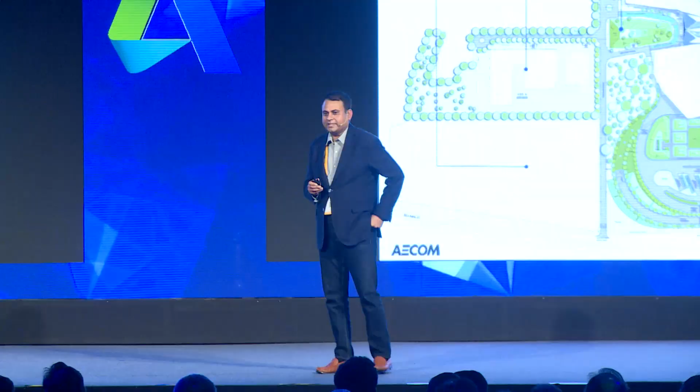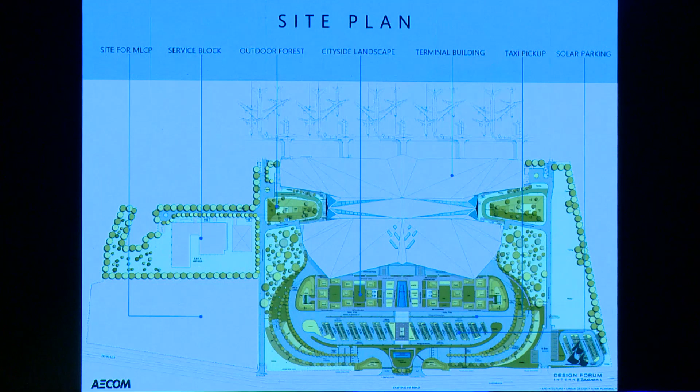So our design for this particular airport was essentially about creating moments, essentially about creating spaces which generate wow. It's a 52-acre site, and in architectural aeronautical parlance, it's divided between airside and city side. The city side has about 52 acres of land, 40 to 45,000 square meters of footprint of the building, airport building, and landscape greens, parking, solar panels, and so on. It's a 120,000 square meter airport building.

That's a close-up, and you can see right in the center the imprint of the origami-inspired sheet roof, aluminum sheet roof that we are putting over there.

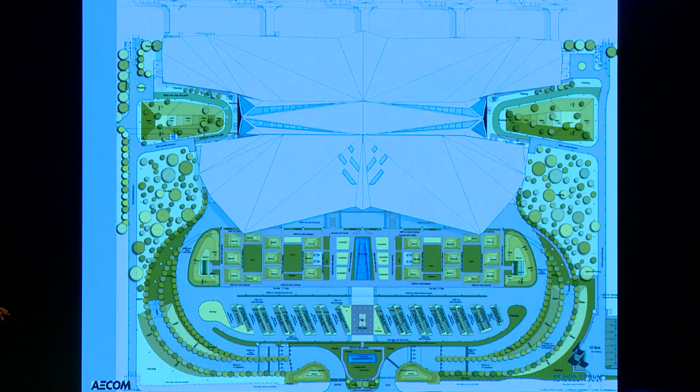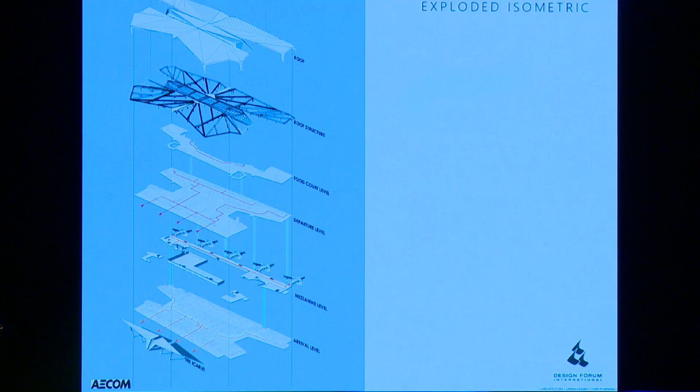That's a section across the building, so it's a 4-level airport. The ground is arrival, of course. The level above is a mix of baggage handling as well as the arrival corridor coming out of the plane and getting to collect your baggage. Departure is a level up, and there is a food court level which is slung over the departure, opening into double-height spaces on either side. There is an extremely complex steel structure on top of it, over which there's an aluminum sheeting roof, inspired from origami, sitting as the final roof of the building.

It is a front inspired by the tea gardens of Assam, because it is in Assam, in Guwahati. There is Icarus, right in the front. And then there are various aspects and components so essential to an airport, which are interspersed through various levels and various spaces.

That's the other section, the sectional perspective on the other side. And what you'll see here is on the extreme left and extreme right, there's a green pocket, which is what we're calling the indoor forest. Probably for the first time in Indian airports, there's actually a large internal forest, indoor forest, abutting an even larger external forest on the other side of the glazing.

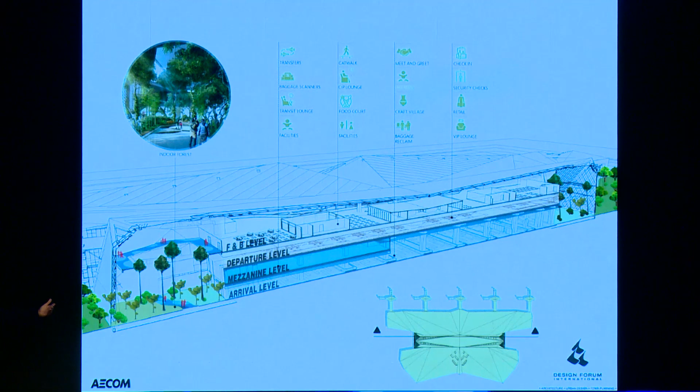So that essentially is a large 2,500 square meter space on both the domestic side and the international side, which is essentially an indoor forest, experienced by people arriving into the airport as well as people departing from the airport. People arriving actually have to pass through it and walk around it. And the people on the F&B level, from the departure, actually get a look and feel, walking around a blue-colored catwalk that you'd see on the screen in front of you.

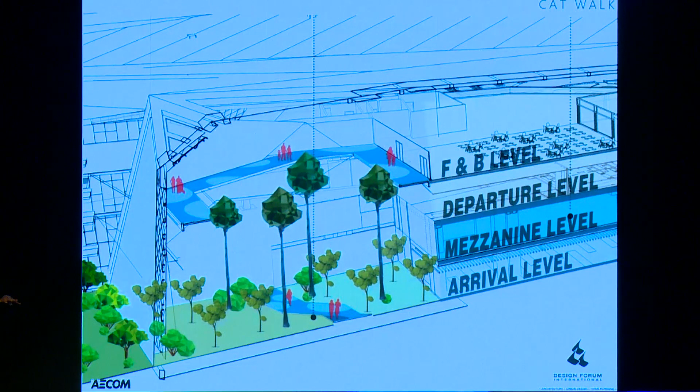You can actually stand there and touch the trees coming all the way from 15 meters below, and the roof.

So origami is not just an art, it's also an expression. We've all flown paper planes in our childhood, made boats out of paper, and we continue to do that. So this is how the form evolved, and this is where I want to bring in why BIM came into play.

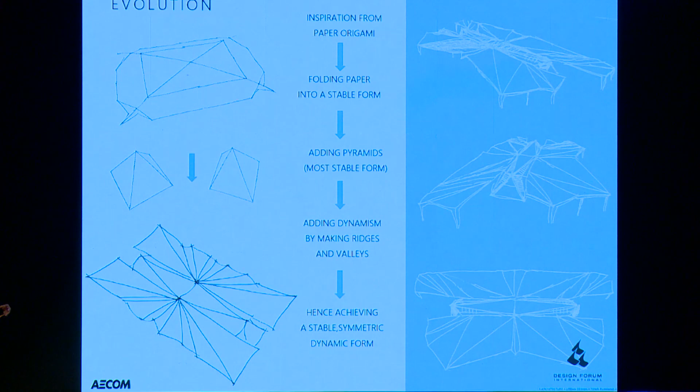So like all architects, you start with an airport as basically a box. We started with a simple box and tried to create some supports on the periphery. But we weren't happy with that, so we said we need to add some jazz to it. We added two pyramids on the extreme sides, left and right, which is what the indoor forest is made up of. And then we found it still wasn't sexy enough, so we had to add a little more jazz. We created ridges, valleys, origami-inspired angles.

Doing all that, there was one comfort at the back of our minds: we were creating an extremely complicated structure, but we had software to back us up. We were mandated to do this in BIM, and luckily so. So that's the roof for you, with skylights to allow for natural light.

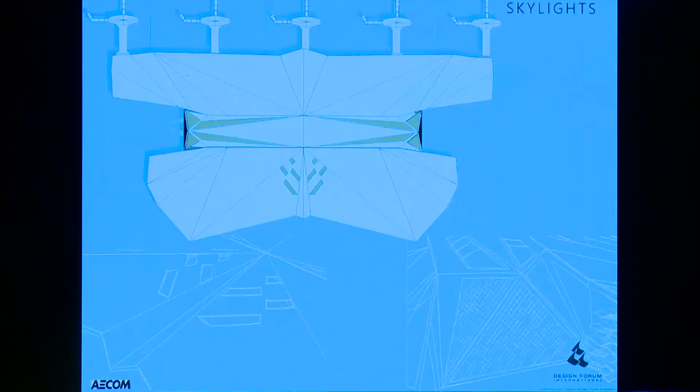That's the check-in hall. You can see the natural light filtering in, and you can see the shape of the roof.

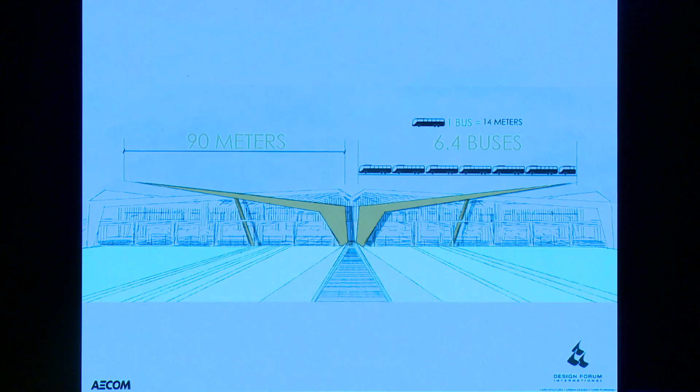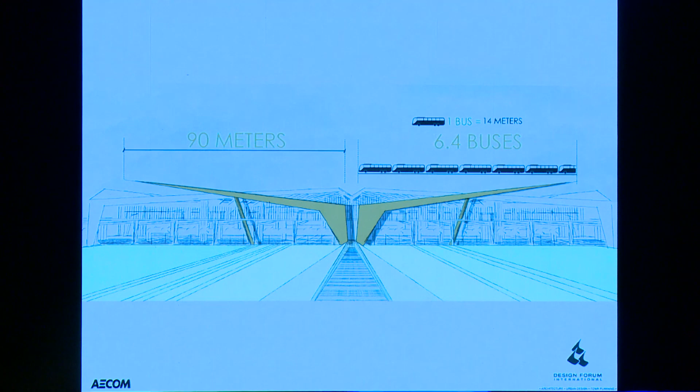The Icarus. Now, what is the Icarus? It is that ancient inspiration, but in our case it is also the canopy at the departure level, serving car drop-offs at the concourse. Imagine the size of this - it is almost 200 meters long, supported at only 4 locations. It is 90 meters on every arm, as long as 6 Volvo buses.

And it is humongous. It rises 27 meters, only supported at 2 locations, at the bottom and at 10 meters - a massive steel structure. Our structural engineers and contractors are having a hard time doing it, but so be it. Now this is what it is going to look like when completed. So the Icarus becomes the backdrop, the inspiration, and the drop-off canopy, all rolled into one.

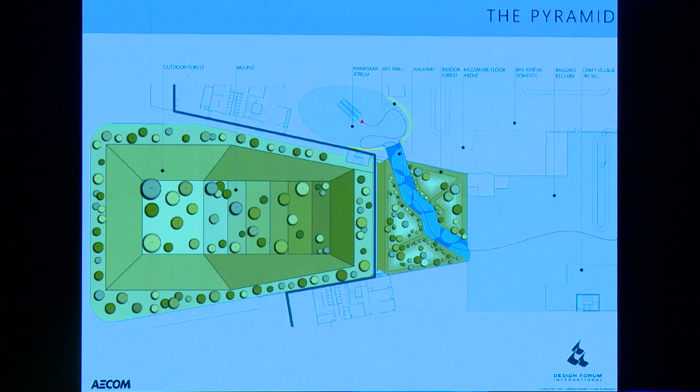Now, indoor forest - this is where the fun is. It is essentially a pyramid, and if you see that blue zigzagging pathway, that's what one needs to take as one comes out from the aircraft on the way to collecting baggage. You can't walk straight, you have to walk in a zigzag fashion. We want our people to experience it, not just rush through.

And there is an outdoor forest, right next to that gray glazing line that you see. So there is an outdoor forest merging visually with the indoor forest, creating a huge immersive green experience.

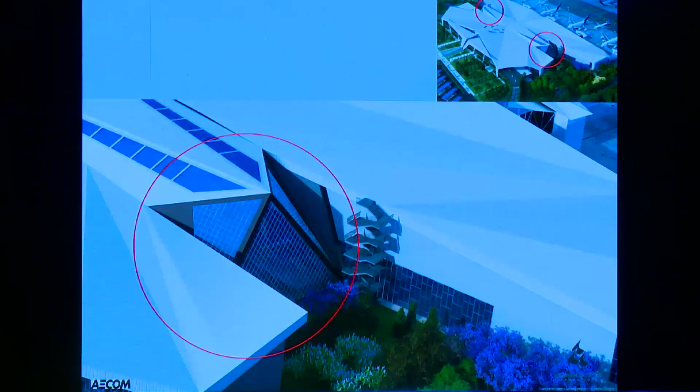That's how it looks from the outside, and that's how it will be experiential from the inside. It's a 27-meter high space, awe-inspiring, huge, takes your breath away. This is what it will be treated like eventually - there is indoor plantation, art, jazz, and light.

Check-in counters, again inspired by origami and being fabricated as we speak.

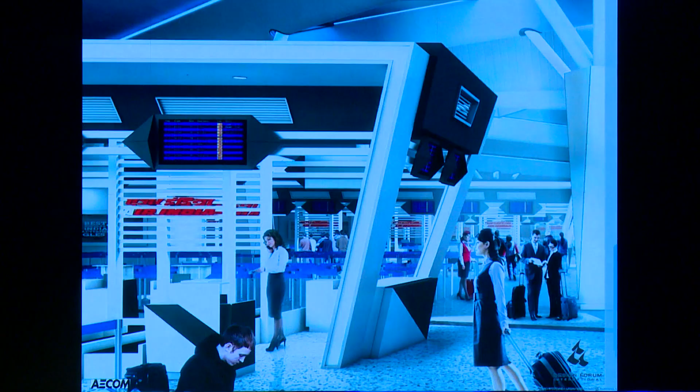Now, we created a craft village. A craft village is very different from how we normally approach art in our country. We essentially pay lip service to art by putting posters on the wall, saying 'wow', and moving on. We wanted to create immersive experiences. So we've fit in a craft village at the departure level as well as the arrival level, where people actually have artisans sitting there, practicing their craft.

As a traveler, if you have time to spare, you can go spin a wheel or make a paper toy or a wooden toy. So you actually feel what that artisan is going through as he's doing it. And this is what it is going to be like - eventually, it's cast aluminum with Sanskrit scriptures on it.

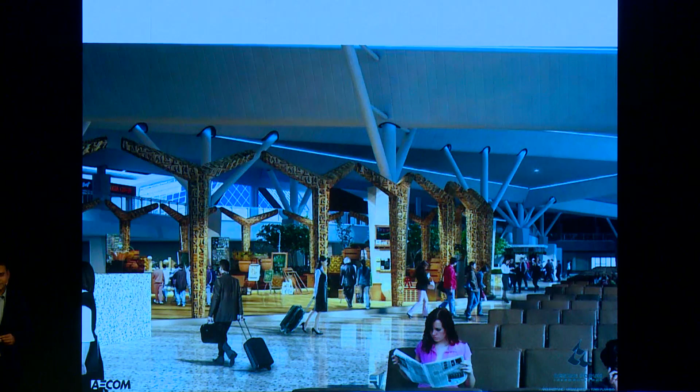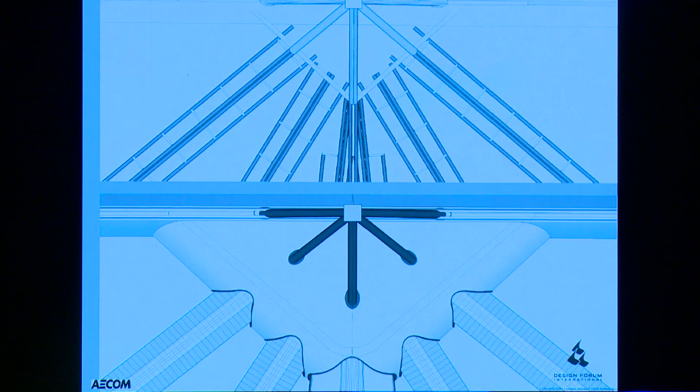It's an extremely complicated steel structure, with multiple trusses converging all at once. I wanted to take you through the complication of the steel and how we are dealing with it. These are trusses 2.5 meters deep, going at unimaginable angles. All 56 trusses are different from each other.

And they are at multiple angles. Because there is so much complication, this is where we relied on BIM and Revit specifically, to take help and actually model it, and eventually also do the right surface treatment using the same platform. So we've been able to do false ceiling treatments which hug the geometry, adding to and accentuating it rather than taking away from it.

You can see there are 5 different trusses converging at a single point, and the steel is mammoth. It's a big nightmare to detail it. And then we are treating it with very beautiful materials so that steel efficacy and efficiency is there, but the aesthetics is not compromised. And we are further accentuating it—architects being architects, it all eventually has to look beautiful too.

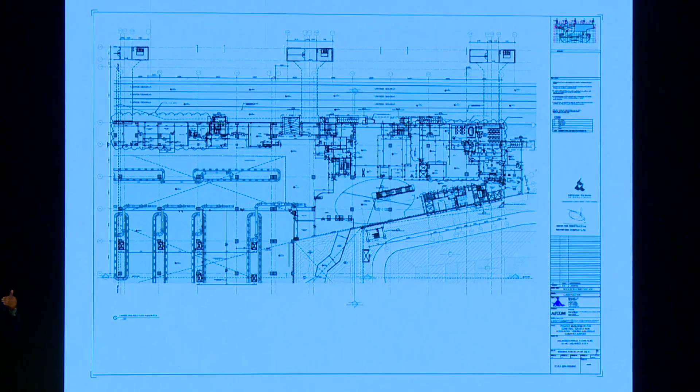In addition to all that, there is something extremely complicated to an airport, which is the baggage handling system. This is the first time we have actually modeled a baggage handling system into a BIM model and coupled it with architectural, structural, and so forth models, so that all of it fits at once. We'll see a walkthrough about that later.

I'll quickly run through drawings because I want you to actually enjoy the walkthrough, which is 3.5 to 4 minutes long.

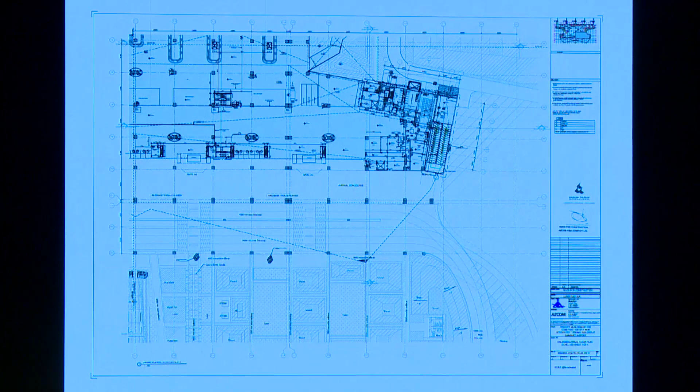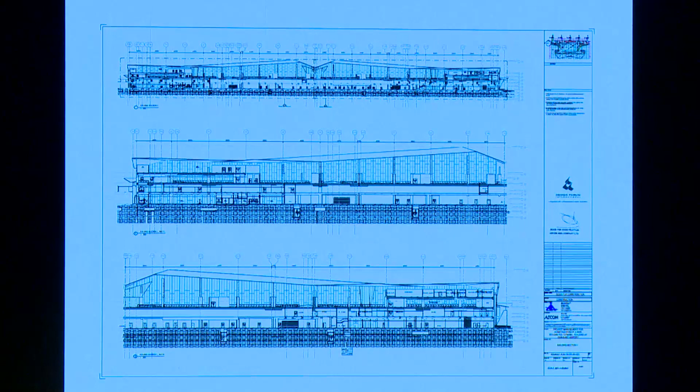Elevations—this is regular stuff. More elevations, and these are not planes, right? So there were never any true elevations. Had it not been for BIM, we would not have been able to expand all the surfaces and detail those out individually. So sections, all details, structure, ramps, staircases—this is the mundane stuff, not much to it, but I just wanted to give you a flavor.

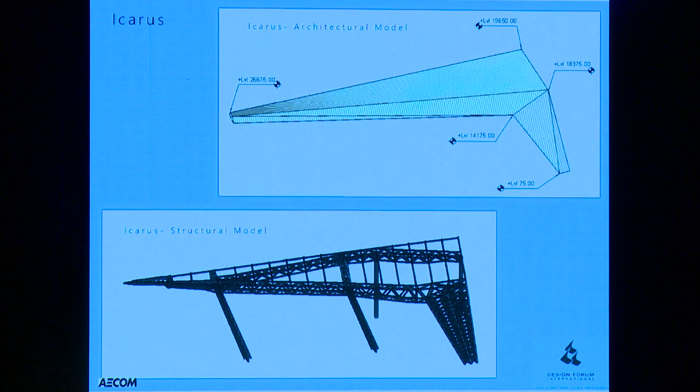Structural model—now this is where the real impact of BIM integration into architecture came, right from the piles. There are piles which have been modeled, integrated, evaluated, designed. Steel main roof—now this is where the piece, the icing on the cake is, again in BIM. Icarus, that humongous 180-meter-long structure, modeled, designed, and now being delivered using BIM. The models of other structural elements are pretty simple, I would say, but this is where the real complication is, right?

Now, our structure is essentially about a lot of tunnels. An airport is an extremely services-sensitive building, so there are tunnels going under the airport carrying services. Imagine a 4.5 by 4.5 meter tunnel with 20 different disciplines passing through it, right from HVAC to data cable, LAN cable, IoT, and everything to be coordinated and delivered.

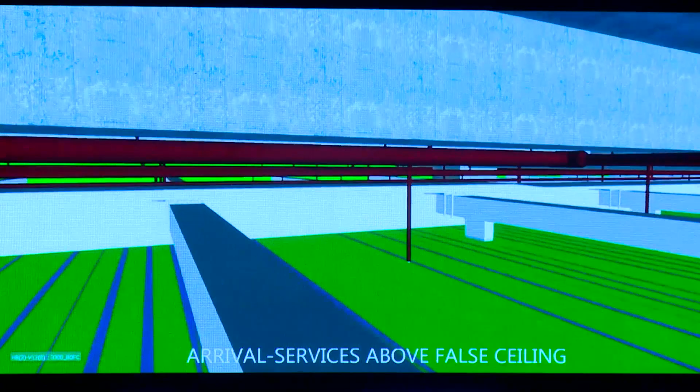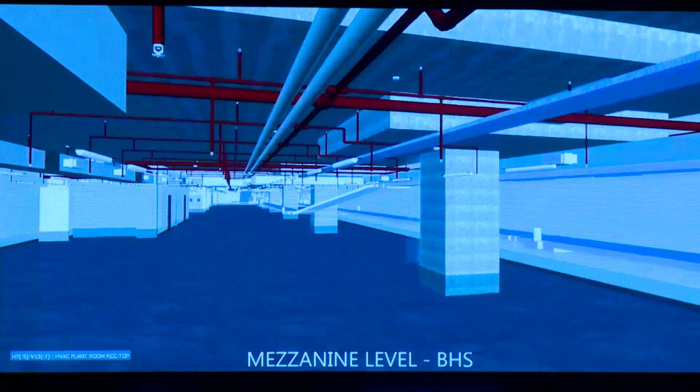That's the baggage handling area.

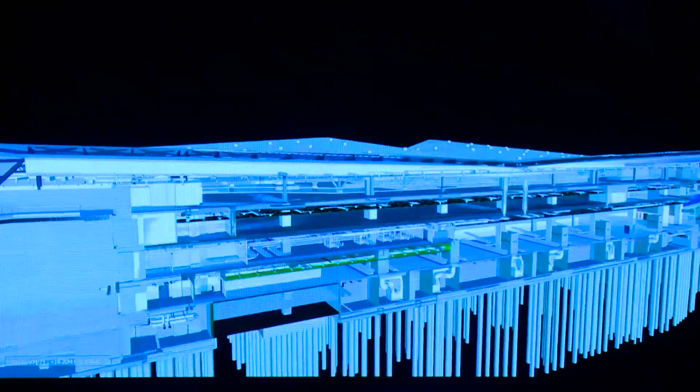Thank you very much. Thank you, Anand.